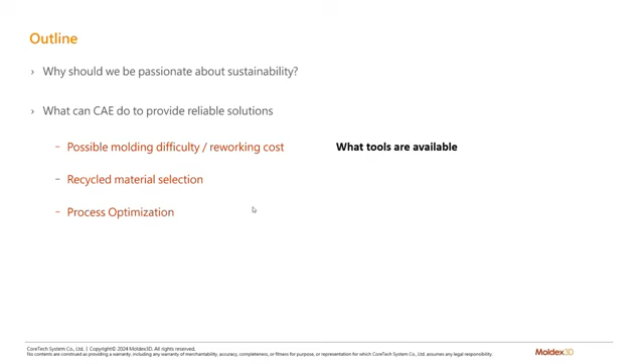So we'll look at what tools are available for recycled material selection, like the software sensitivity to material viscosity, which gets impacted by the regrind percentage. For process optimization, we'll show a live demo of Moldex3D DOE functions, as well as lightweighting options and using our iSLM for energy conservation.

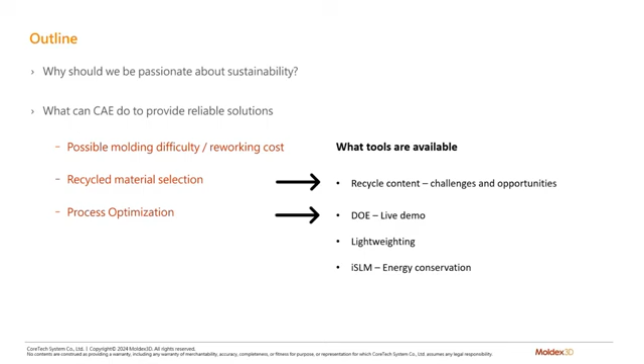So why am I personally passionate about sustainability? Well, over 20 years in manufacturing, I've always strived to reduce waste, cut manufacturing costs. However, I've witnessed and unfortunately been a contributor to waste in material at engineering trials and other related costs and troubleshooting. So that's me in a 2,500-ton press with parts larger and weighing almost as much as I do. So you can imagine the amount of material waste and defects in troubleshooting, as I'm sure many of you can relate.

I'm a longtime user of simulation technology, and I know that it offers a powerful avenue to model and test various alternatives and those what-if experiments. So it allows us to explore various scenarios and their environmental implications.

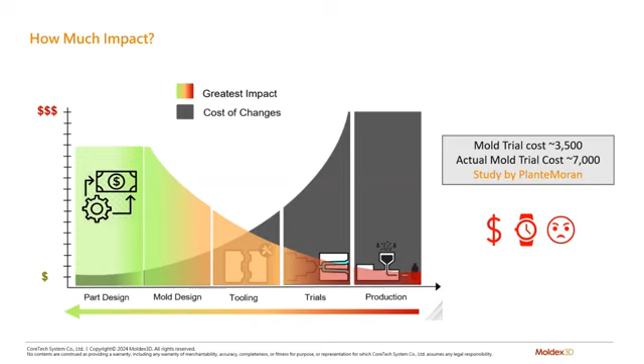So let's look at the impact of unnecessary costly and time-consuming molding trials. The best time to evaluate your part is before tooling is kicked off to avoid costly changes, including engineering hours at mold trials. So by effectively utilizing simulation technologies in the molding process, we can significantly reduce the time and costs associated with mold trials.

This optimization leads to more parts produced per hour, lower material waste, mold reworking costs, and utilizing machine integration through our machine mode can lead to faster time to market and energy savings. Integrating these tools with the manufacturing process enhances efficiency and profitability.

So the simulation software in CAE can offer valuable insights during the design phase, minimizing the need for repeated trials and errors. And these technologies help detect potential molding issues early on. You know, the reworking costs, material waste, again, leveraging these tools effectively can drive progress towards more sustainable and environmentally conscious manufacturing practices.

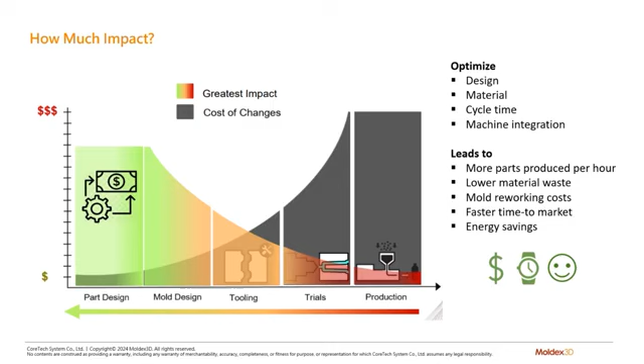So let's move on to recycled materials. Waste is gaining greater attention and solutions are in demand. Due to the exhaustion of resources and the requirements for environmental protection, all countries are advocating the concept of sustainable development, especially for plastic products to reduce and reuse.

Well, in recent years, various countries have proposed various regulations or policies hoping to achieve a balance between economic development and environmental protection and make full use of plastic products in economic activities with minimal environmental impact. Although many have been implementing the concept of design for recycling and some have already succeeded, it still remains a challenging task.

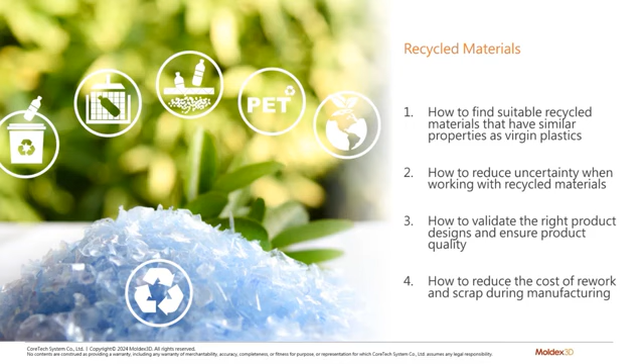As a designer, you're very likely to face these problems during the product design process, such as how do you find suitable recycled materials that have similar properties as virgin plastics? How to reduce uncertainty when working with recycled materials? How to validate the right product designs and ensure product quality? And how to reduce the cost of rework and scrap during manufacturing. So these problems may seem daunting at first, they are, but they will be a lot easier when you have the right tools.

Choosing the ideal materials in the design phase is crucial to reduce the failure rate in production, and it guarantees good molding behavior. However, recycled materials have very different physical properties compared to virgin materials, and that's due to the molecular structure, breakdown, and the number of regrind cycles.

So to get accurate material data, you can submit a material testing request to Moldex3D's Material Characterization and Research Center. This is equipped with high quality measurement instruments and ISO accreditation. Our Moldex3D experts will run controlled measurement tests on the provided recycled material and virgin material.

Material data will be available via a custom app, which will include shear viscosity at 5 different mixing percentages and how shear viscosity will be affected by the number of recycling cycles. This will help you find the blends with similar processing properties to the virgin plastic.

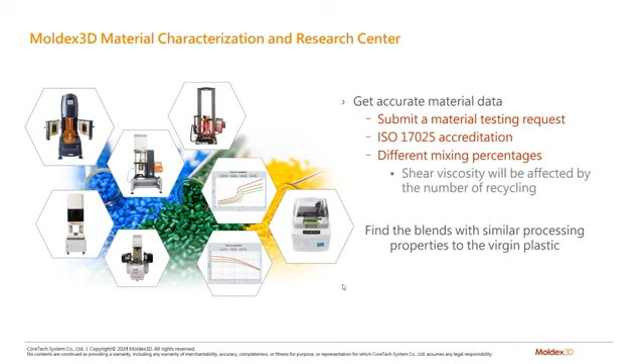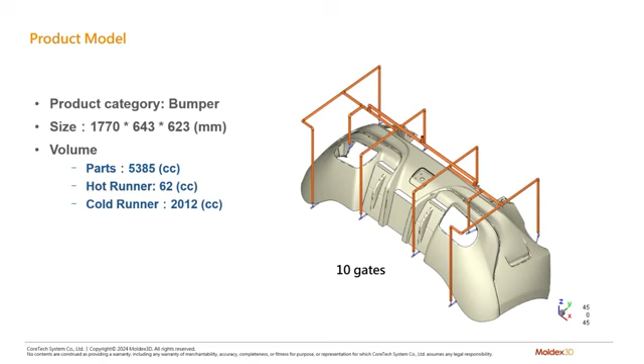So the initial molding conditions are based on the best conditions of virgin material. It is worth noting that, different from the phenomenon that the viscosity of recycled plastic decreases, the viscosity of the recycled PP selected here is larger than that of the virgin PP. In the process of remelting the recycled plastic, there will be some chemical reactions that increase the molecular weight. Various reasons may cause the viscosity of the recycled PP to increase, but subsequent comparisons will only be made between virgin PP and 100% recycled PP.

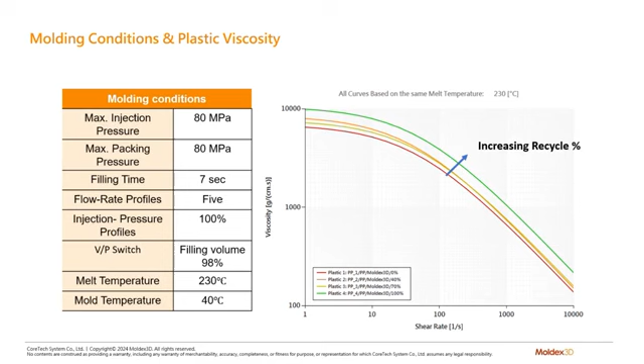Because the viscosity of the recycled PP is higher than virgin PP, it has a great influence on the filling behavior, especially on large objects. Compared with the flow behavior of virgin, the recycled has obvious hesitation in the center and on the edges, both sides of the bumper. So these images are showing the iso contour of each time step in the filling. The smaller distance between these curves shows a slowing down or a hesitation in the flow.

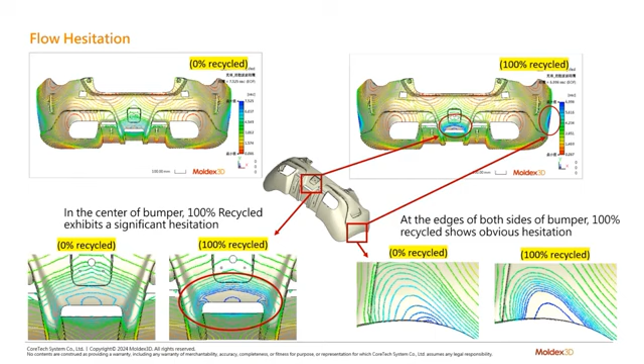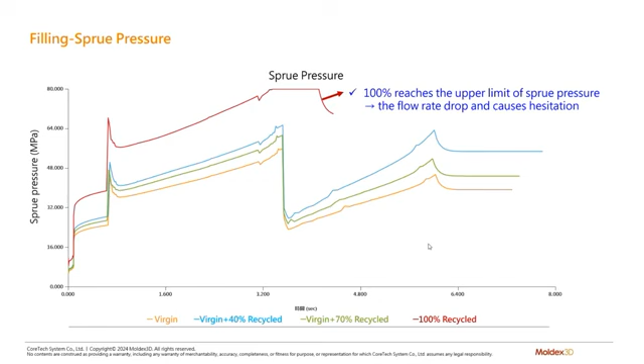So with 100% recycled resin, you can see that the sprue pressure reaches the upper limit of the injection machine and plateaus, so the flow rate drops and causes that hesitation. Because the sprue pressure of 100% recycled content is the largest, so is the corresponding clamping force. If the clamping force is not enough, it is easy to cause flash.

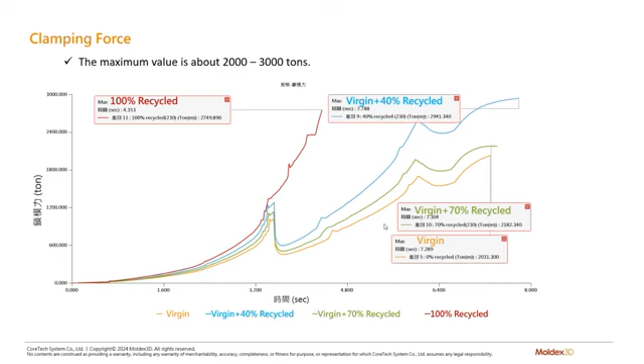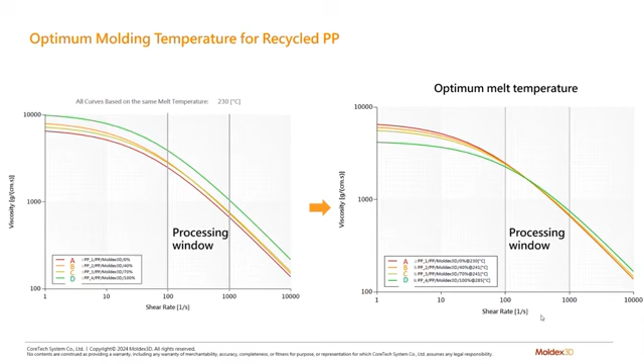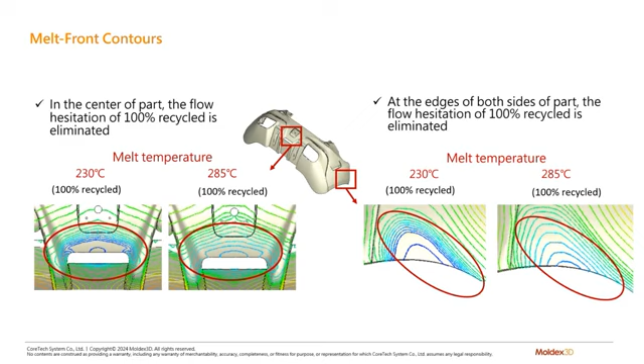So to solve the filling problem caused by the high viscosity of the recycled PP, the most convenient method is to adjust the melt temperature. Increasing the melt temperature of the recycled PP can reduce its viscosity to be the same as the virgin. In this way, the filling behavior of the recycled material is similar to that of the virgin. After increasing the melt temperature, the melt front of the recycled is now similar to that of the virgin, so the flow front hesitation has improved.

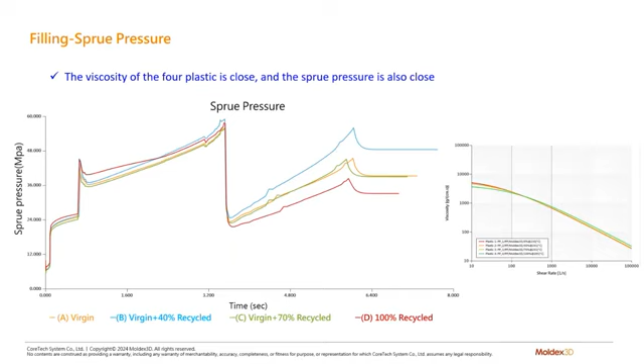Also, after increasing the melt temperature, the viscosity of the recycled is now close to that of the virgin. So the sprue pressure of the recycled is similar to that of virgin, and no flow hesitation can be found during the filling. And then, of course, that leads to the clamping force. A lower sprue pressure ultimately leads to a significantly dropped clamping force that now falls into the appropriate range, which happened to be 52% lower.

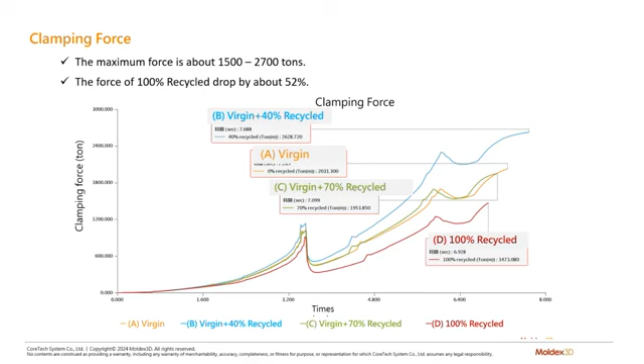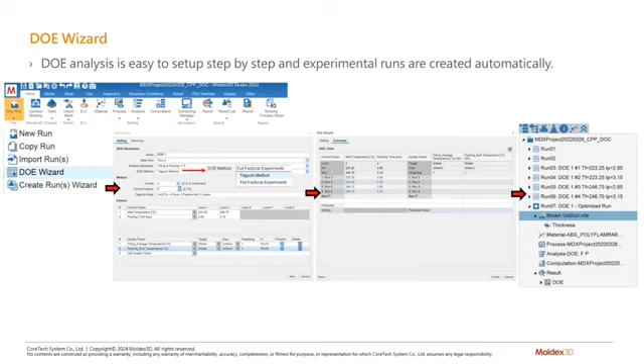So you might be thinking, how many iterations do I have to run to find an optimized condition for my part? This seems like a lot of work, right? Well, you don't have to spend countless hours setting up multiple iterations. Using design of experiments, Moldex3D has the DOE Wizard. A DOE analysis is easy to set up. It's step-by-step, and experimental runs are created automatically. This is an amazing tool to optimize designs and process. So now I want to show you just how easy this is.

A lot of you might be familiar with this part. We've shown it a lot in our demonstrations. But you always want to start out with an initial run, which in this case was a full analysis. We're going to go to New Run and select DOE Wizard. From here, you just have your basic information. You can name your DOE, and you want to make sure that you are assigning your base run. In this case, we're going to use a full analysis with the Taguchi method.

So your levels are going to be your number of changes. As we go through these control factors, we can have a minimum, a middle, and a maximum. We can increase it all the way up to 5. But keep in mind, more levels or number of changes will increase your number of runs, which then increases your computation time. For control factors, I'm going to set it up as 4 control factors. And you can see we have quite a long list of different variables here.

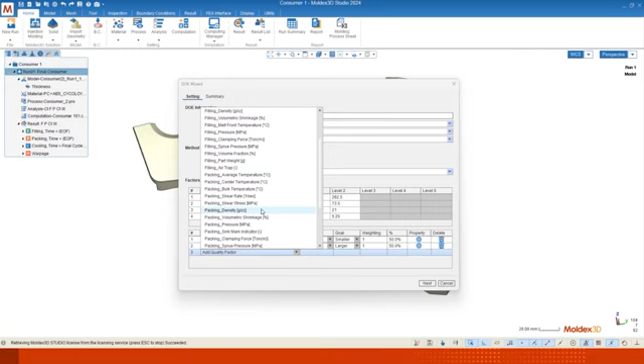Now for quality factor, this is what we want to evaluate or say maximize. Again, we have quite a long list of different quality factors. And as most of us want to know, we always want to know the total displacement, right? Maybe in this case, we want to look at part weight. Maybe we're looking at reducing the overall part weight. We can also look at volumetric shrinkage.

Now for warpage target value, we're going to put global, which means the overall part. But you can also set up probes. If you're wanting to strictly look at one location, if you're having a problematic area that's creating a warpage concern, you can set this up by probe numbers. We're going to stay with global. And of course, we want the smallest warpage amount.

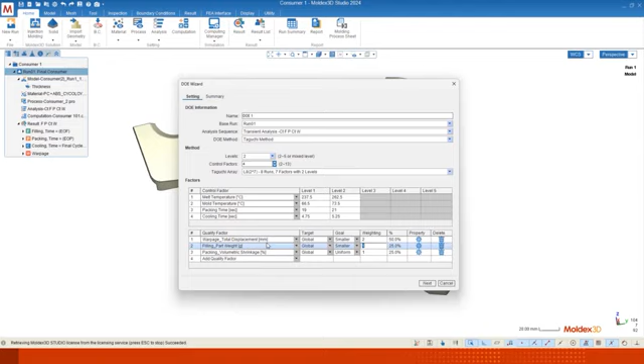You can also set it up as nominal, where if you have a target value that you want to reach. Weight, we also want smaller. And volumetric shrinkage, we want it to be uniform. Now, the weighting of these quality factors can be adjusted. Right now, I have them all equally the same. But by changing this weighting factor, I can say that I want to consider warpage as a higher percent than the other two factors. Hit next.

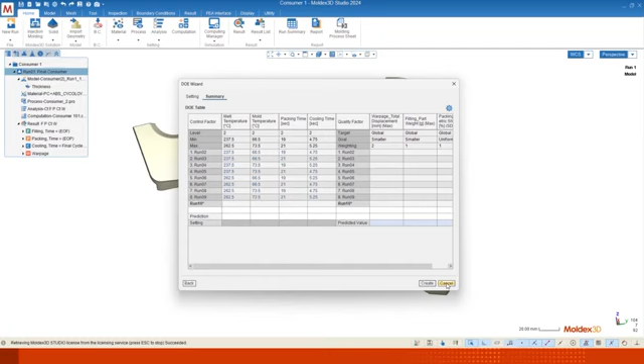And this now creates our matrix. So this is the number of runs that it's going to run by the inputs that you just had given it. And then run 10 is going to be your optimized run. So let's bring in the results. This was 9 additional runs, a full analysis on approximately a 2 million element count. It took about 4.5 hours for this entire DOE.

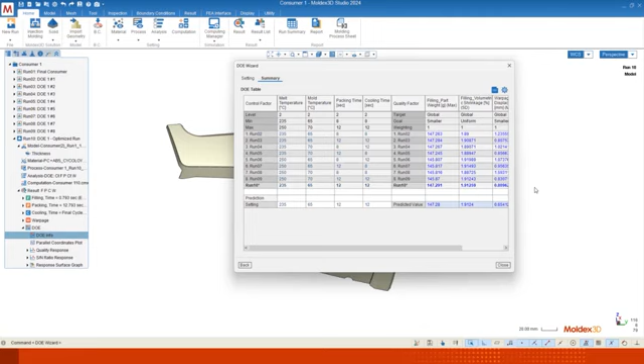So if I go down to the DOE results, in the DOE info, you can see your summary page. This gives you all of the outputs of your quality factors as well as your optimized run. If there's any additional factors that you wanted to consider, you can always add those in after you have run that analysis.

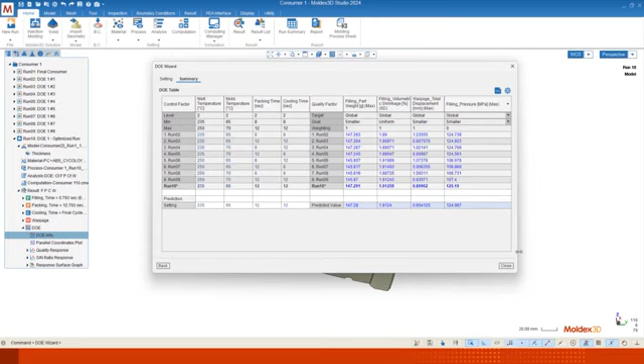So let's just say that you want to meet your minimum part weight. What parameters did those have to consider to meet a minimum part weight? But you're also jeopardizing your overall warpage. So these are just things to consider early on in your design phases. Maybe we want to consider the lowest possible warpage, but maybe we can meet in the middle for volumetric shrinkage because we haven't built the tool yet, so we can adjust that. Or maybe we can change materials.

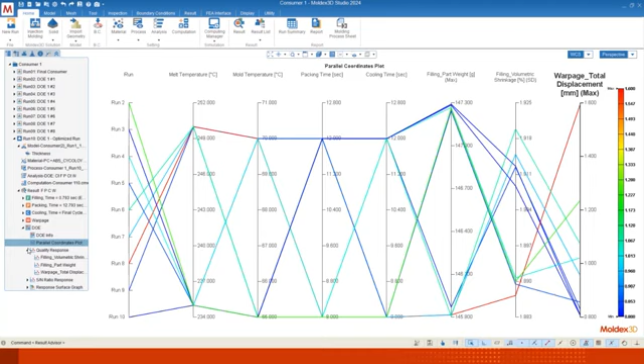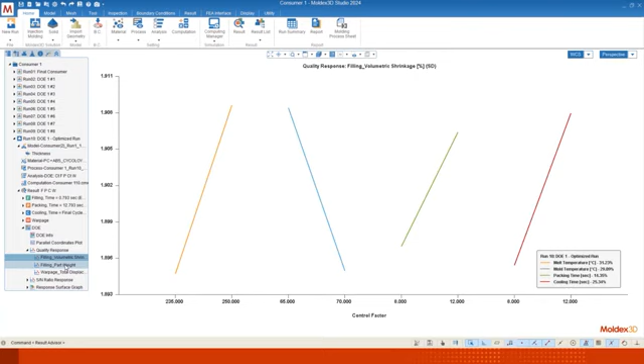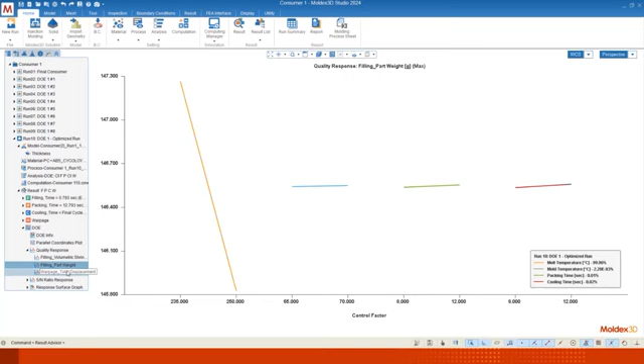In the quality response chart, this plot shows us which is more impactful. So in this case, all of your factors had a pretty big impact on your volumetric shrinkage. But if we go to part weight, the only one that had the biggest impact was melt temperature. And then for warpage, we have packing and cooling, which is understandable.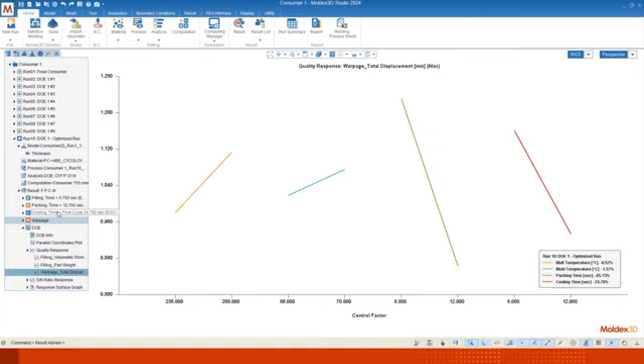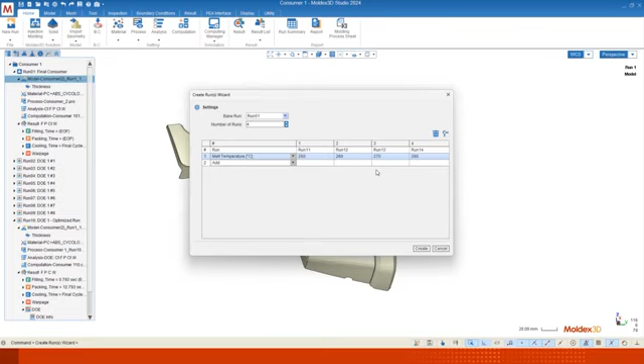Now I wanted to show you one more feature other than our DOE. On your initial run, you can also do a create runs wizard. So in this wizard, you're going to have your base run, and you can have a number of runs based on the same criteria. So say, for example, you only want to change your melt temperature. You can run several different iterations automatically with one click. Now, of course, this method will not give you an optimized run. You will have to go into each individual run to see your results.

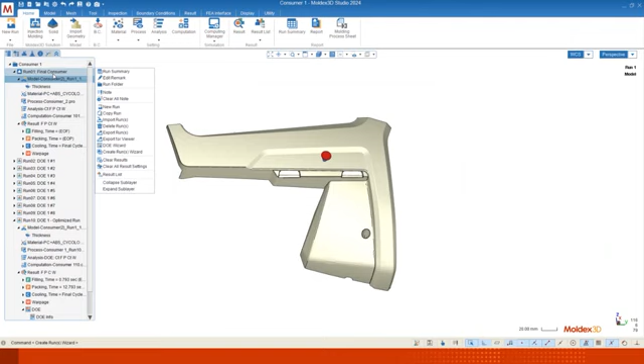Another nice feature is the run summary. So if you want to compare your results and your parameters in one quick, easy chart, you can select which runs you want to compare. You can also change your selected items. And you can export to an Excel file.

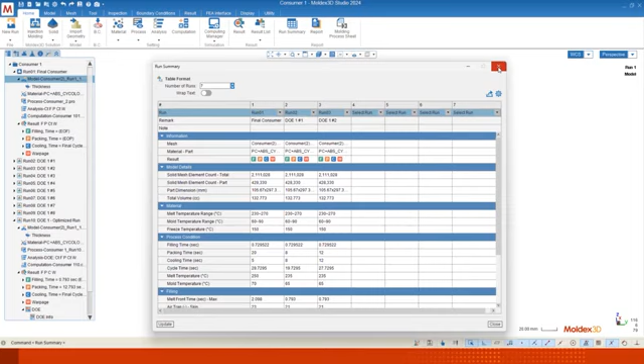Okay, the next topic is lightweighting. So lightweighting plays a crucial role in increasing fuel efficiency and reducing CO2 emissions, particularly in industries such as automotive and aerospace. So by incorporating things like foam injection molding technology, manufacturers can significantly reduce the weight of plastic components used in vehicles and other applications.

So as a result, lighter vehicle parts contribute to better fuel economy. The engines require less energy to propel the vehicle forward. And additionally, the reduction in material usage and weight not only decreases manufacturing costs, but also results in lower CO2 emissions throughout the product lifecycle, thus helping us meet the environmental regulations and support global sustainability efforts.

So let's look at the example of chemical blowing agents, or CBA. So the great thing about foaming agents is that a standard injection molding process can be used and there's no need to modify the machine. It can easily be added with a mixing blender or hopper. So this chemical reaction forms low molecular weight compounds that act as blowing gas, and it introduces bubbles into the part walls. So let's look at the case of this box geometry.

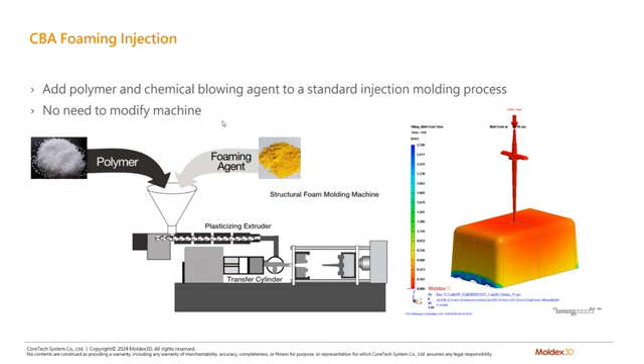So Moldex3D can simulate the nucleation and the growth of bubbles when the melt flow is injected into the cavity. It can calculate the bubble size, the number, the density distribution, the volumetric shrinkage. It can predict the interaction between the melt flow and bubble development. It can accurately predict the effects of bubble structure, the part warpage, and weight reduction, as well as evaluate the core-back process.

So, of course, the bubble development within the part wall can vary from part to part. However, in the cross sections of this box geometry, the cell size of the actual part compared with the simulation results have very similar trends.

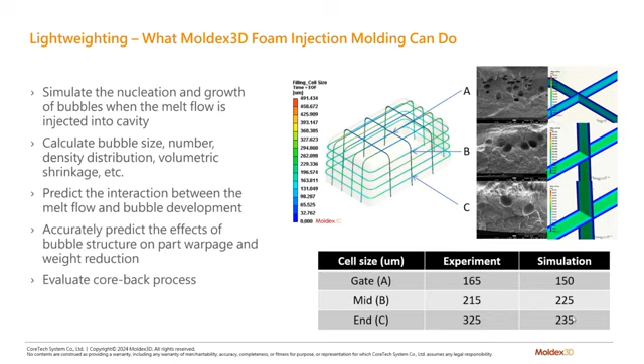So the advantages are manufacturing cost savings and quality improvement. You can reduce the weight by 6 to 12%, reduce cycle times 15 to 35% by using lower melt temps and mold temperatures, smaller tonnages, improve flatness and warpage, high dimensional stability, reduce stress in parts, and then, of course, a greater design freedom. You can use thinner walls and thicker ribs without any sink concerns. As shown here are both the results of simulation and the real molded part, the warpage direction, and the magnitude of the sink.

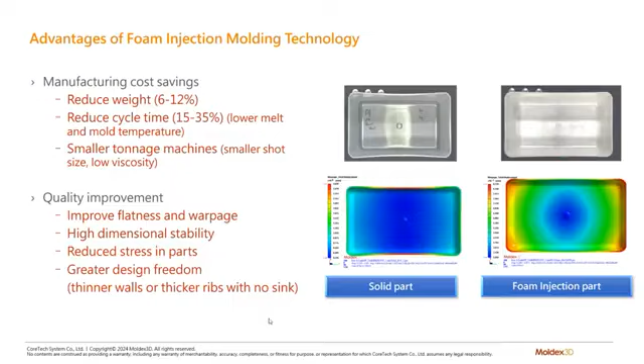All right, lastly, I'd like to touch on CO2 and energy savings calculations. So why do we need to support carbon emissions? Well, in support of global environmental protection, actions are taken to evaluate the environmental impact of human activities, ensuring compliance with EU standards for product production, and striving for goals like tax reduction.

In Moldex3D's iSLM, which is our intelligent simulation lifecycle management, is our data management platform. So users can collect power consumption records for main supply of the injection machine and any auxiliary devices like chillers, hot runners, grinders, etc.

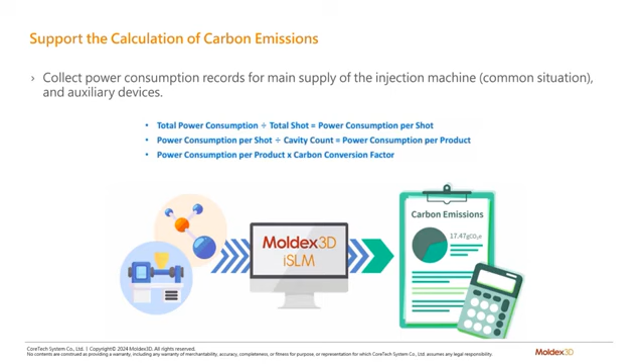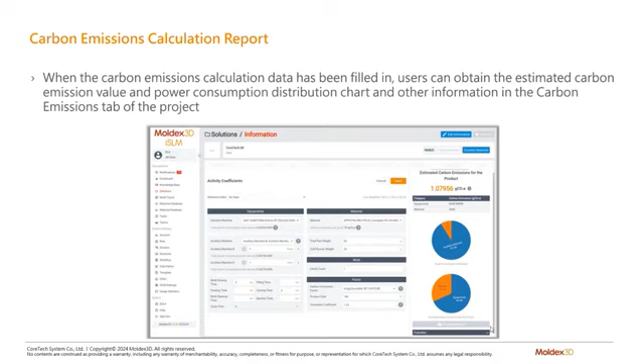So then when the carbon emission calculation data has been filled in, users can obtain the estimated carbon emissions value, power consumption distribution chart, and other information in the carbon emissions tab of the project. In addition, the carbon emission calculation report in the solutions page can also be exported to an Excel file. We can take this one step further to communicate and compare your material carbon emissions when using recycled resins and create an action plan for your business and supply chain.

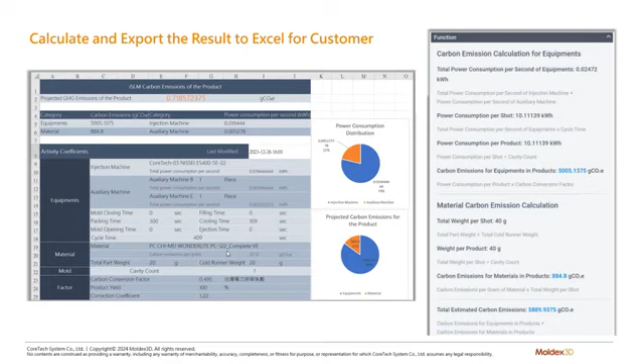Well, this concludes today's webinar.